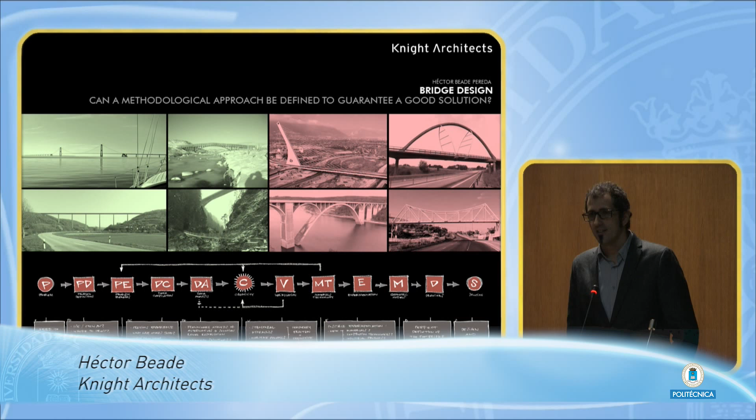The title of my presentation is Bridge Design: can a methodological approach be defined to guarantee a good solution? It's an ambitious topic. The aim is to define a series of steps where the designer should pause on their way to a good solution, but the final objective is to make something useful as a tool for reflection on bridge design as a process, and to reflect on why so many bridges out there are far from what could be considered good designs.

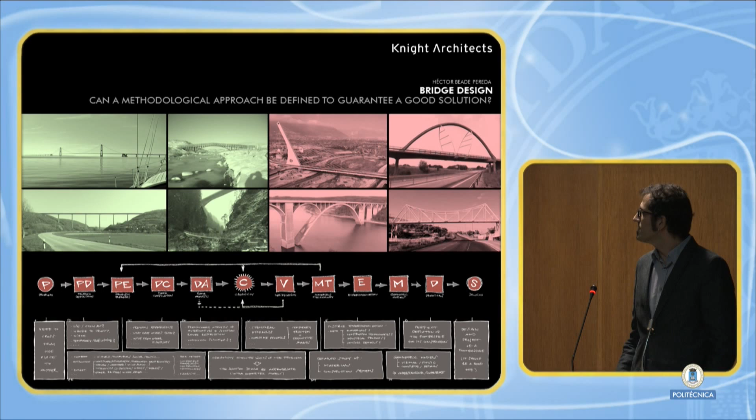We've already seen some of these in the Sebastian presentation. So I'll start with some examples of bridges that moved me to write about this topic.

I'll start with what I call narcissistic bridges—bridges that feel strong, high, and good looking, and use the spans they want independently of the obstacle they need to cross. They can be in large cities of the United States, or the same bridge can be in a small city in the north of Italy, independently of whether what is being spanned is clear or not.

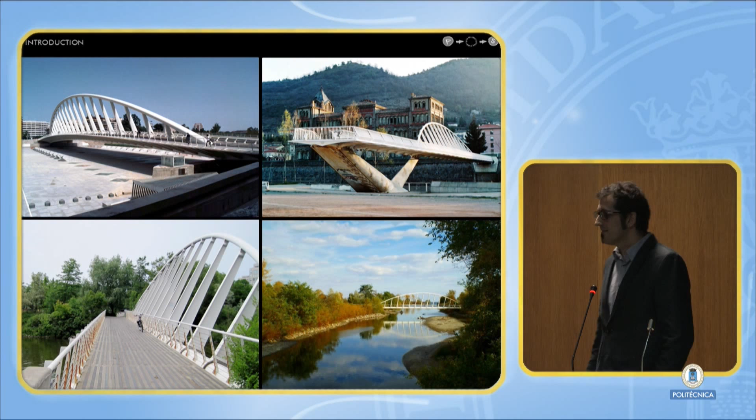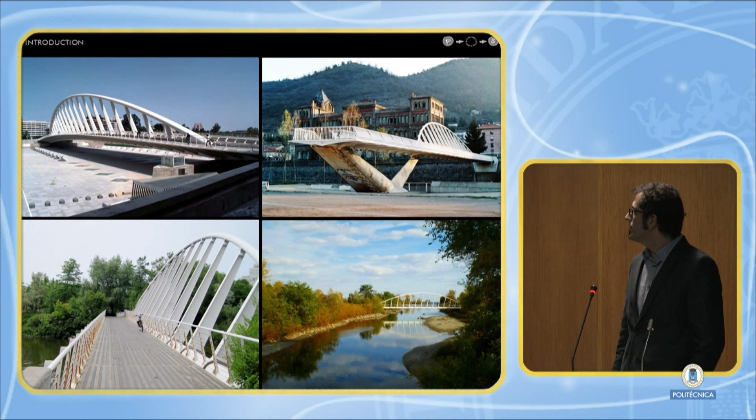What's important is the bridge, not the context. It doesn't matter whether there's an obstacle to be crossed or not. The same landmark design can be used in the countryside, in a large city, or in different urban contexts.

The previous examples were probably arguable as bridges, but could be considered nice solutions, some as macro sculptures. But when others try to copy the same layout, the result is different—they don't have value even as macro sculptures.

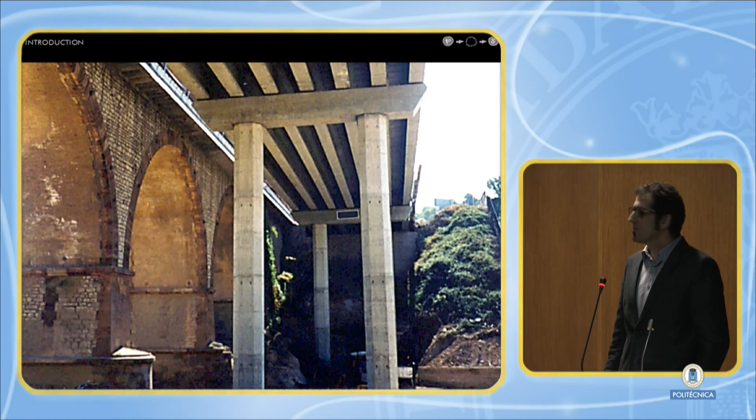There's another type of narcissistic bridge which seems the opposite, but shares in common that they're only worried about themselves—about solving the crossing problem easily and fast, with low investment in design. They can be extensions of historic bridges, cross rivers with piers inside the water, or solve complex road junctions.

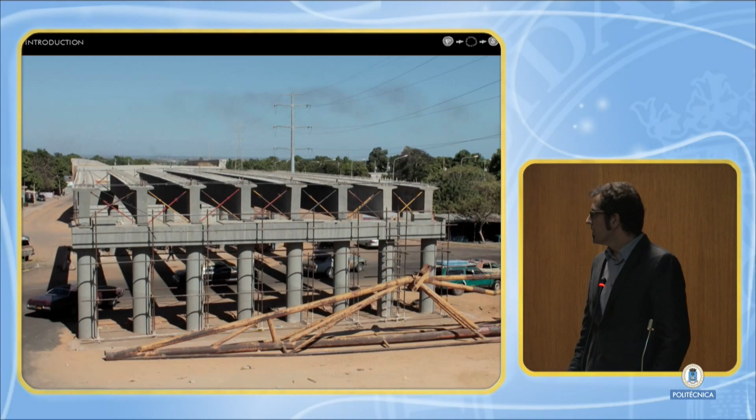You'll know many examples like this around the world. The same happens with footbridges—it's widely used in Spain because you don't need a designer, you just use drawings published in the 70s and modify them, and you have a bridge. You end up with a side span over ground longer than the main span, which is clearly bad design. You can find this type of footbridge everywhere.

But all of them need to stand for 100 years or more. So every bridge is important. Every bridge should be carefully designed. And this doesn't mean it would be more expensive.

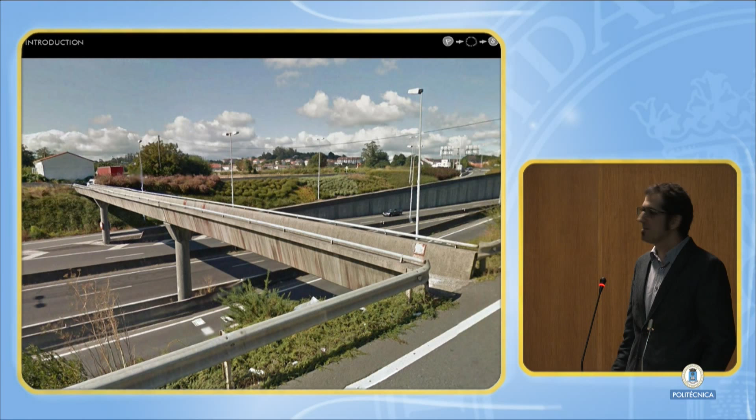This is an example of how a designer is sometimes considered useless—using U-shaped precast concrete beams, you have a footbridge with the parapet included. So why would you need a designer? And the pipe runs outside the bridge, but who cares about these things?

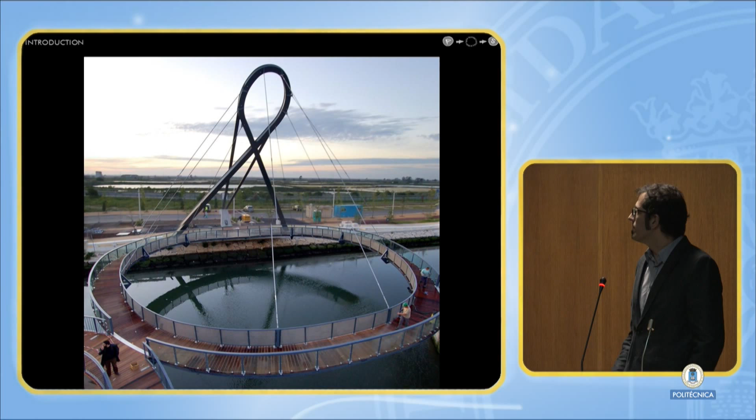Nowadays there are no limitations in terms of structural analysis, construction, and geometrical modeling. So everything is possible. Bridges that were not an option years ago. Some examples are good, some others are improvable, but everything is possible. This makes that sometimes things are built just because it's possible.

This is an example of a bridge, it could be in the narcissistic chapter. It's a footbridge with 4 different ways to cross, and all of them have steps, so functionality is not relevant. Any disabled person, or non-disabled person, could not cross the footbridge comfortably, but who cares?

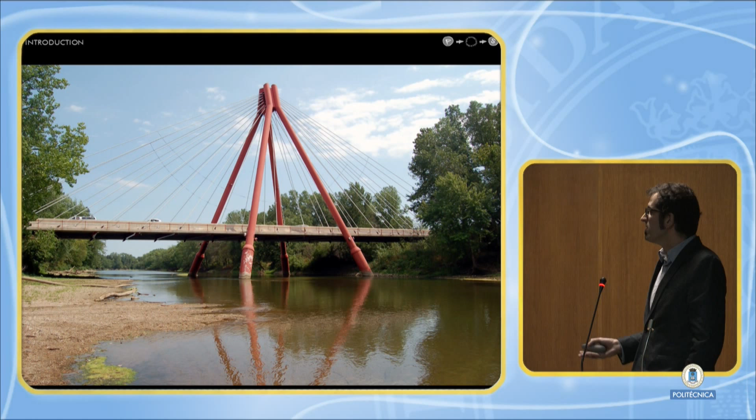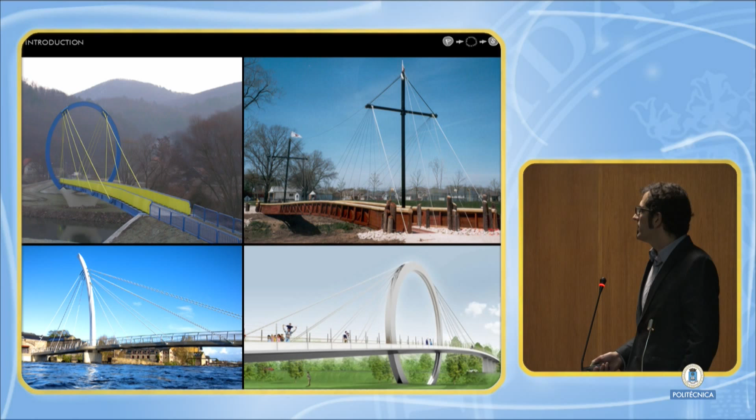There are hundreds of examples of bridges that sometimes are structurally orthodox, but you think they should have been better. This is an example of a bridge that crosses a river with a cable stay scheme, and all the substructural elements are inside the water of the river, which is surprising. Some of them are likely wrong from the structural point of view, or very wrong, as this one.

This is another example, you can find them everywhere. This will be orthodox from the structural point of view. It's a bridge type that's difficult to make work visually well, but will be right. This is a bit more strange, but maybe right. And this is absurd.

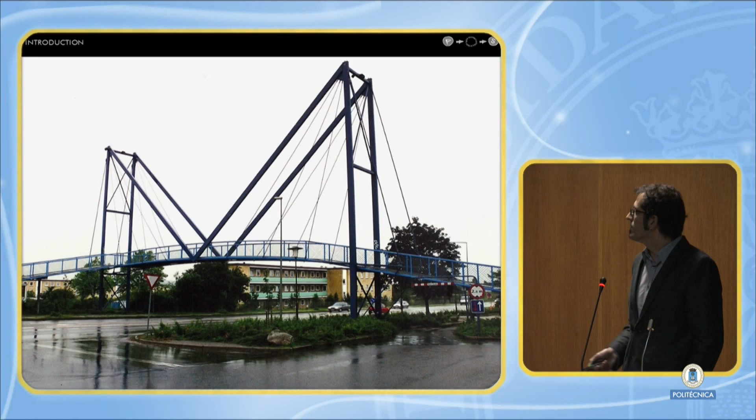This is just to contextualize that there are no limits, and everything is considered and even built. There are other examples that you don't know if they are absurd or not. It's difficult, or worthless, trying to understand them. They are everywhere, close to my home.

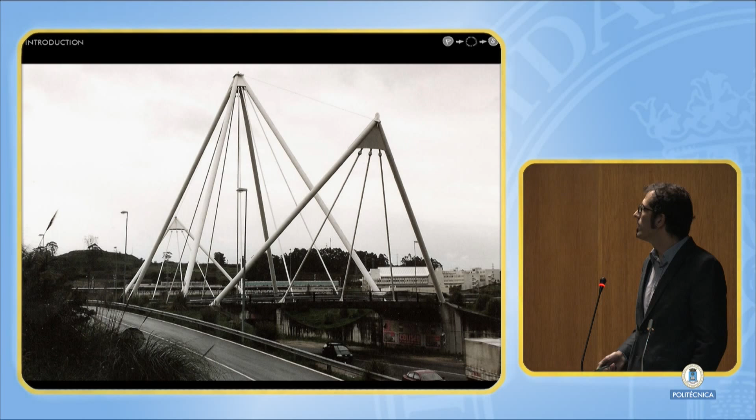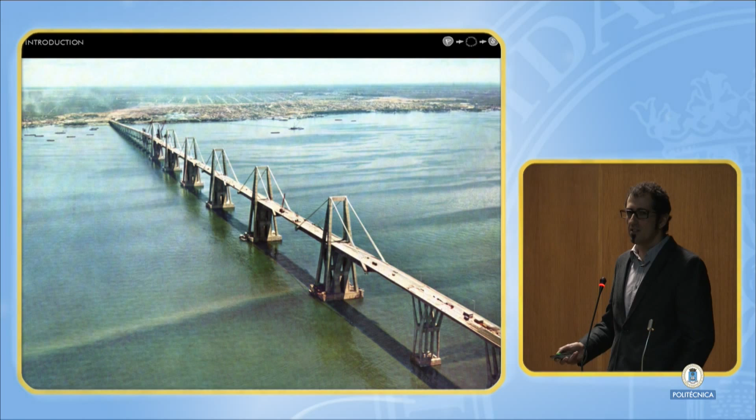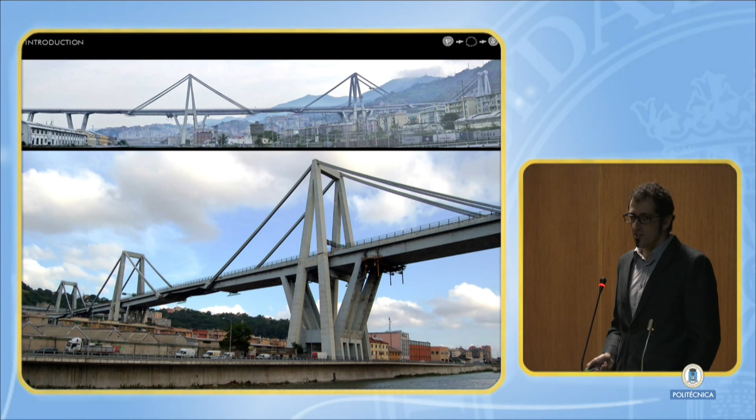An example of how a design can be good or bad depending on the context. This is a famous bridge, the first multi-span cable stayed bridge, which looks reasonable in the immensity of the Maracaibo Lake in Venezuela. It looks weird, a bit wrong in Libya, in this V-shaped valley - this should have been a deck arch - and completely out of place in an urban context in Genoa. That's what comes to my mind.

So to compensate part of the negativity caused until now, I'm going to show you some examples of bridges that I consider good designs. And the question is, does a good design need to be striking? So these are just some bridges I consider good designs. This has been shown before.

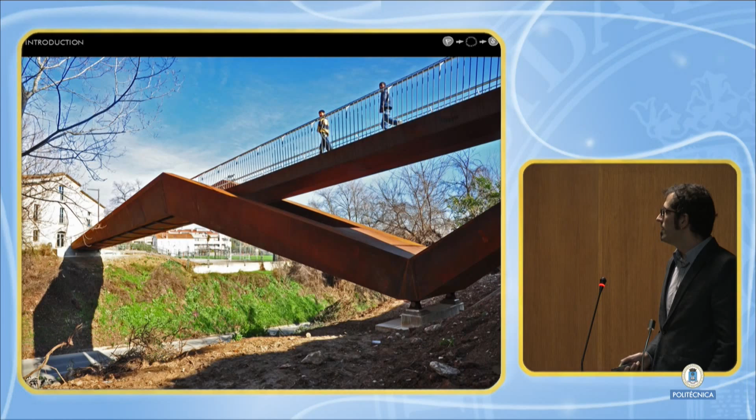The first step in the process will be the problem. In this case, the problem in bridge design is simpler than in other disciplines. In industrial design, the problem could be very variable. The problem is always the need to cross from one place to another. So the first question will be: do we need to cross? And if we need to cross, do we need a bridge? This is the responsibility of the client, of the owner.

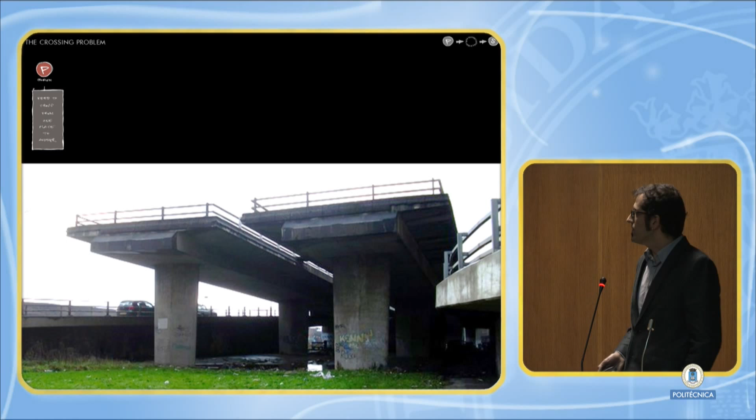There are a number of bridges that have started to be built, and after decades they are still unfinished. It's probably because they weren't so needed. So this will be the first question.

The second question will be the problem definition, which is again the responsibility of the client and the owner. A designer can be involved or not, preferably yes, and it can be the final designer or not. Some of the points to be defined would be the use of the bridge - road bridge, rail bridge, combined use as pedestrian/cyclists - where to cross, plan alignment is very important, the width of the bridge depending on traffic, and if it's temporary or definitive, or if it has temporary uses that are different from the final ones.

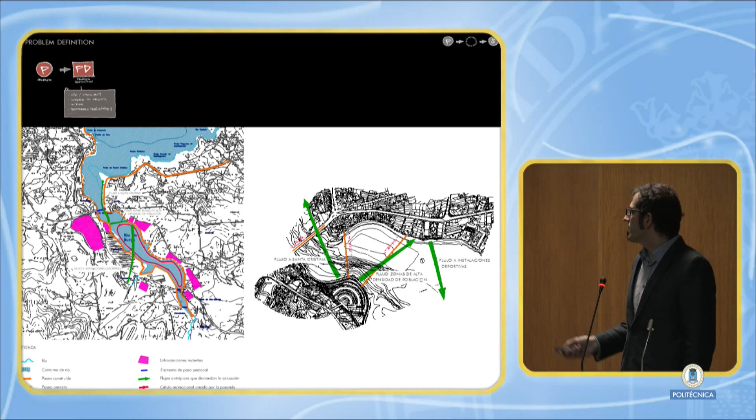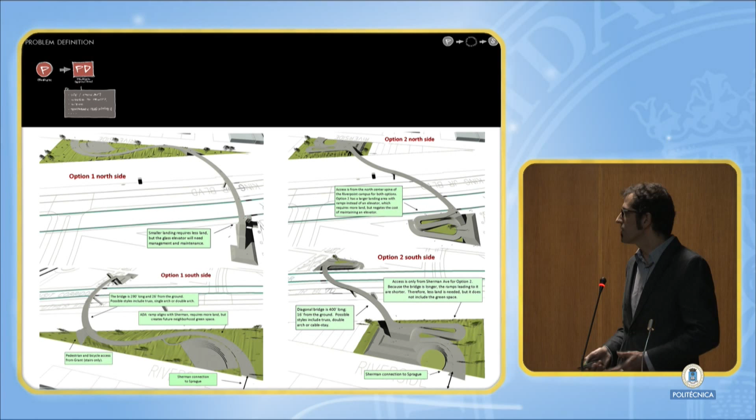So these are some images showing decision making on where to cross in a footbridge. This is a brief from a competition in the United States. It was part of the brief that the client worked with a designer to choose where to cross before all the teams were involved. A recent project deciding where and how to cross, deciding the width of a bridge.

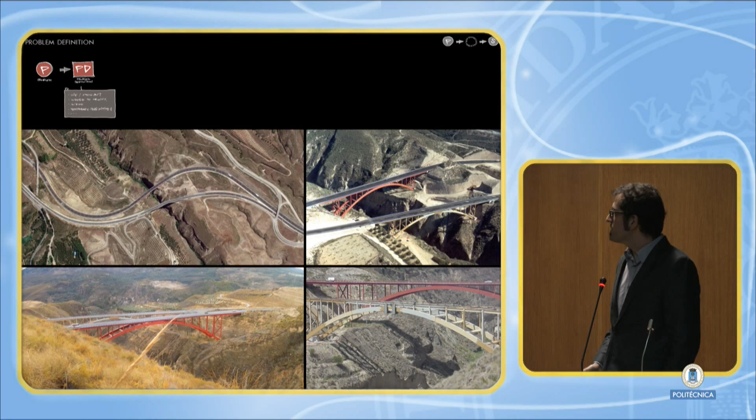This is another example in Spain of two bridges that are really close. The red one was the first to be built. Six years later, the second one was built, which is not parallel, but is close. So it was decided to use the same geometry as the first one, but it wears a camouflage hood. This is because the relation is strange, it's difficult. These bridges should have been a single one or two close parallel bridges.

Next step will be the splitting of the problem into smaller elements. If you try at this stage, when the client has defined the problem, to look for a solution for the whole problem, it will be very complex, and you will probably tend to do something you have done before and just adapt it, because you will be overwhelmed by the complexity of the problem.

So if you split the problem into smaller elements that you can easily understand, and look for solutions to these sub-problems, solutions that could be maybe close to the optimal because they are sub-problems, you will understand better what you have in hand. So some of the problem elements will be related to the context: historic, cultural, social, environment, landscape, wind, seismicity, geotechnics. If there are other bridges in the area, that's important. Also the budget, of course.

So this will help to set the boundaries of your problem. This is in fact the second principle of the Cartesian method, so it's really valid nowadays for many fields of knowledge. The discourse was written in 1637, so it's probably valid nowadays.

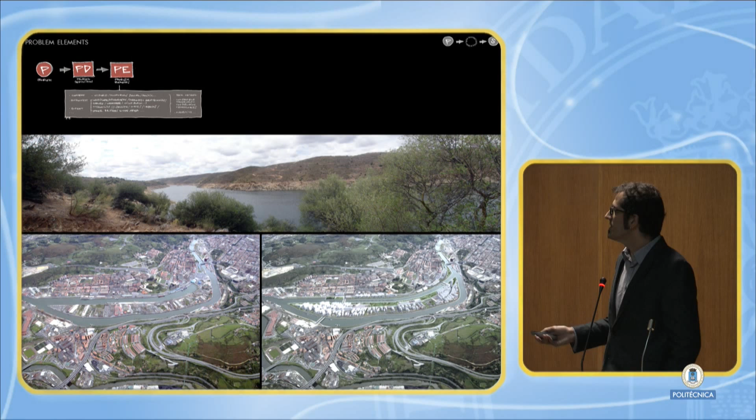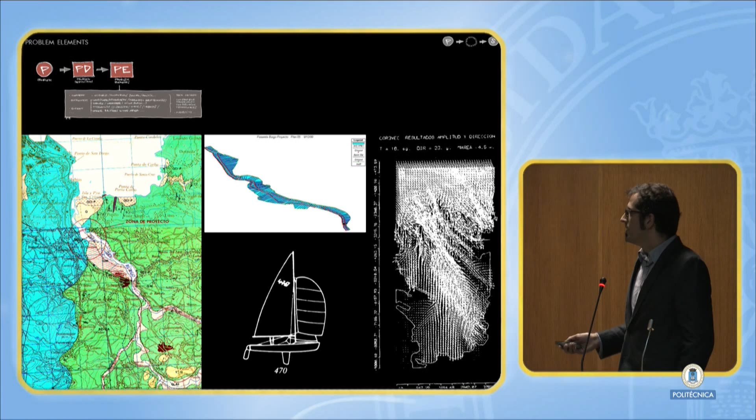Some examples of different environments, in this case landscapes, where a design could be located: rural or industrial and urban, or urban but in the historic city center, or peri-urban, related with the environment but not the landscape, geotechnics, hydraulics, navigational requirements, other bridges in the area.

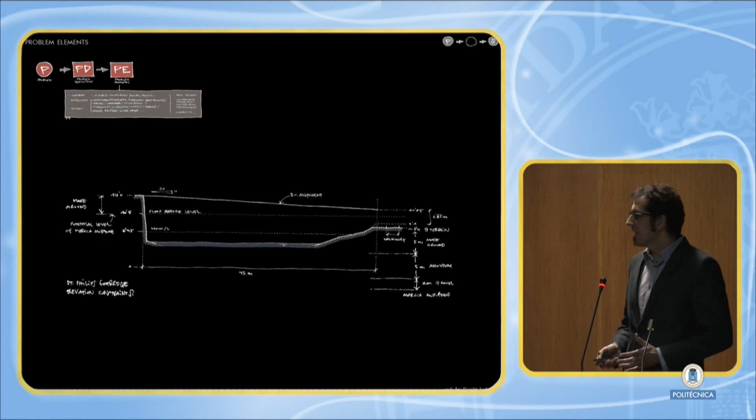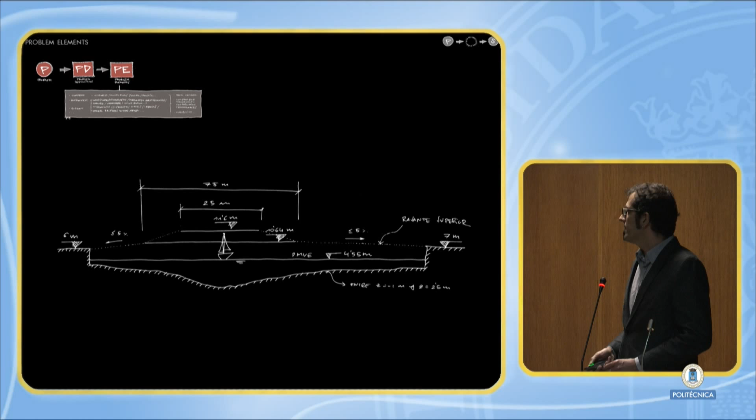After this splitting of the problem into small elements, you will normally have this kind of drawings that would help you to limit the boundaries of your problem, just to focus on what you can do or what you cannot do. So you will have a certain span, more or less clear. You will know what materials can be used or not, more or less, and what construction systems may be compatible.

The next step will be the data compilation. It's not worth trying to invent the wheel in every project, so it's useful to see what has been done before. The first approach will be what have you done before, in your own office, so previous own experience. Then what others have done is also useful and recommendable. And it's also useful sometimes to look for inputs from other disciplines.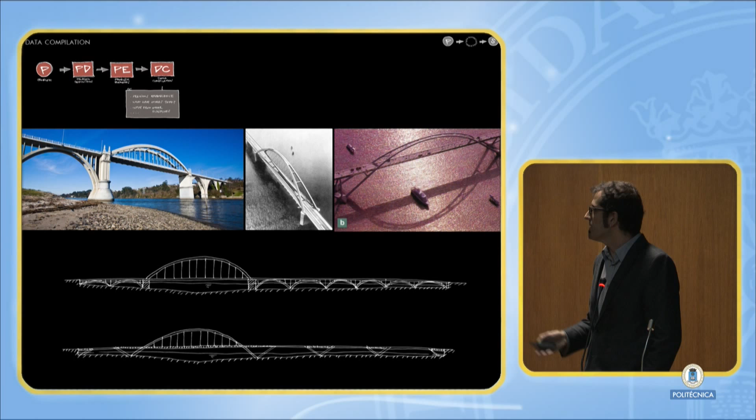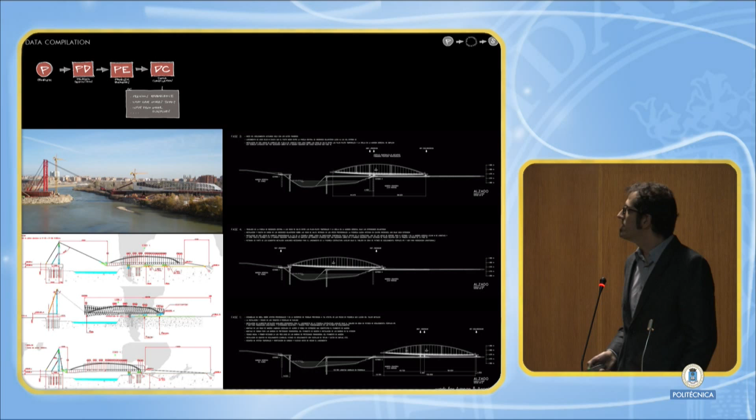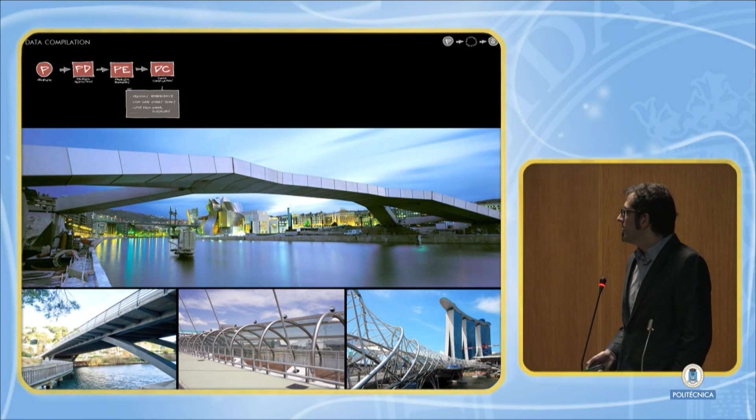So this is an example of an own project, seeing what has been done before in similar crossings, the same in another own project, what construction systems may be compatible with your case. In terms of materials, if you're using novel materials - stainless steel is not so novel, but it's useful to see what others have done. And at the beginning, when these materials are introduced for the first time, it's useful to see what has been done in other disciplines.

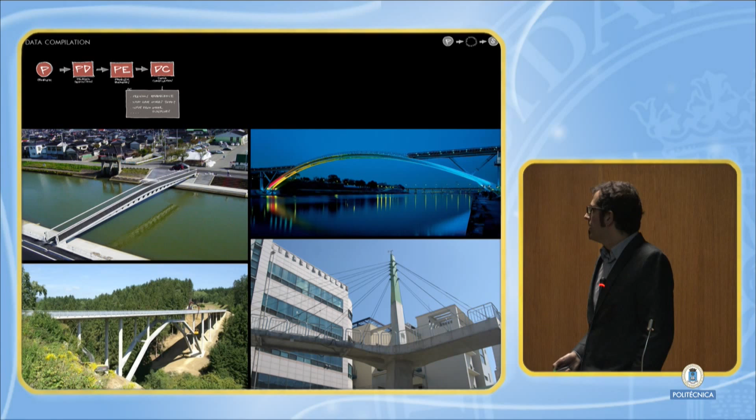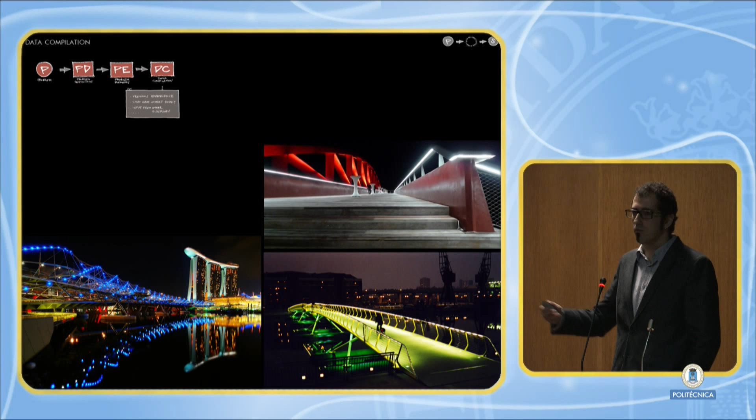Same, this is ultra high performance concrete. Seeing what's the state of the art in terms of lighting is also useful, because it's something that changed a lot, and it's important to take into account lighting from the early steps of design to have a holistic approach, and not to add floodlights to a finished design, which would probably lead you to an improvable solution.

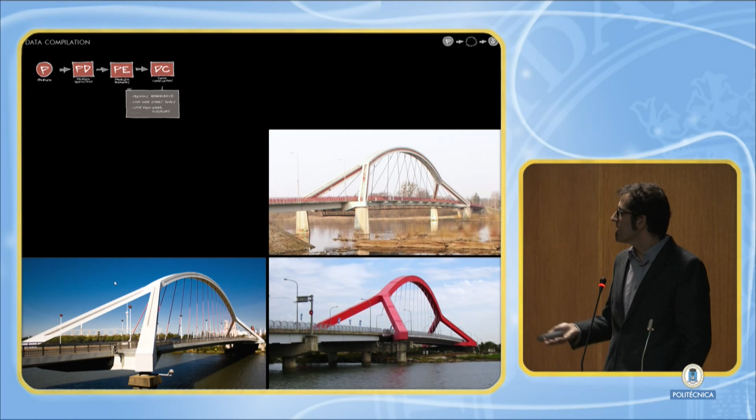But what happens if you go too far with the data compilation and don't just use the same idea, but use the same structural scheme, the same arrangement of elements, and the same detail? You're copying a bridge, and when you're copying a bridge, it's unlikely that you have a good design or a good solution to your problem.

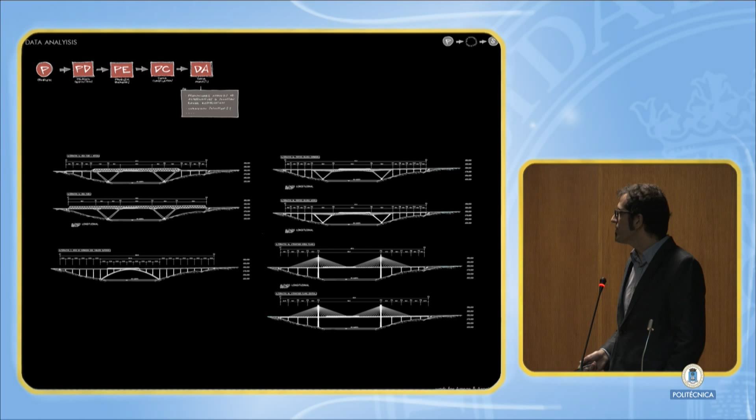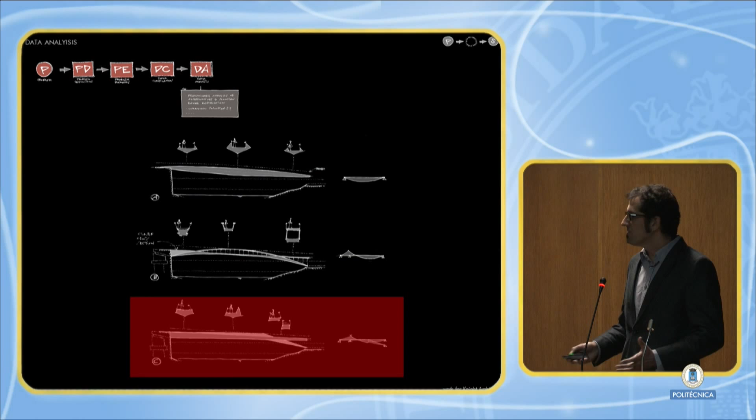Next step will be the analysis of this data. So this is the moment to have preliminary analysis of alternatives, which is, in some examples, not just choosing one alternative. You can choose a series of them. The important thing is to limit your scope, and you can choose as well a range of materials and compatible construction systems, with some cost estimations to know that you're within the range of the budget you have.

So we reach the creativity stage, but having done quite a lot of work before, so it's creativity within the limits of your project. It's not fantasy.

There are apparently two ways of being creative in a design process. Both of them are cognitive, so they require experience and knowledge in the field you're working, and ideally in other fields as well. The first one is deliberate and cognitive creativity. This happens in the prefrontal cortex, and it allows you to pay focused attention on what you're doing, deliberately combining bits of information you have in novel ways. A paradigmatic example of this type of creator is Thomas Edison, doing thousands of experiments and failing, but always going a little step ahead with these failures.

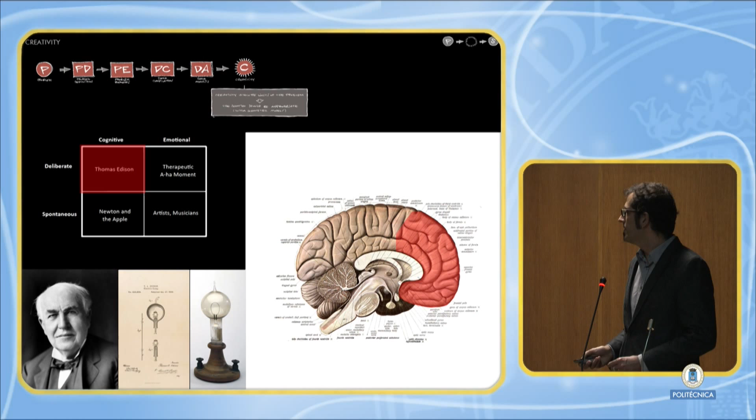The other type of creativity used in the design process is also cognitive. It also requires work, knowledge, and experience, but it is spontaneous. It also involves the prefrontal cortex, but the role of the basal ganglia, where dopamine is produced, is apparently relevant, and this happens outside conscious awareness. This type of creativity happens when you've worked intensely on your problem and then go to sleep or go for a run or do something unrelated, and magically an idea that solves your problem comes up. This is not magic, it's because your brain has been working for you without being conscious. Newton and gravity, seeing an apple fall, is the typical example of spontaneous and cognitive creativity.

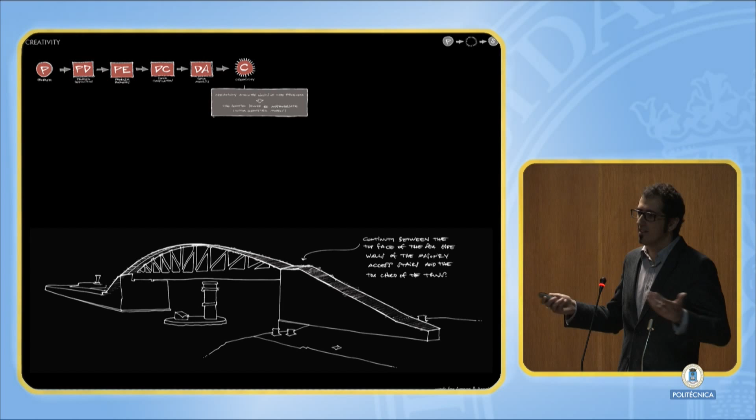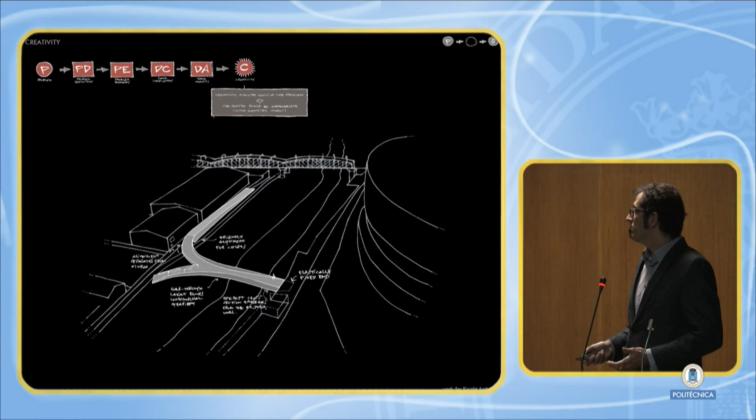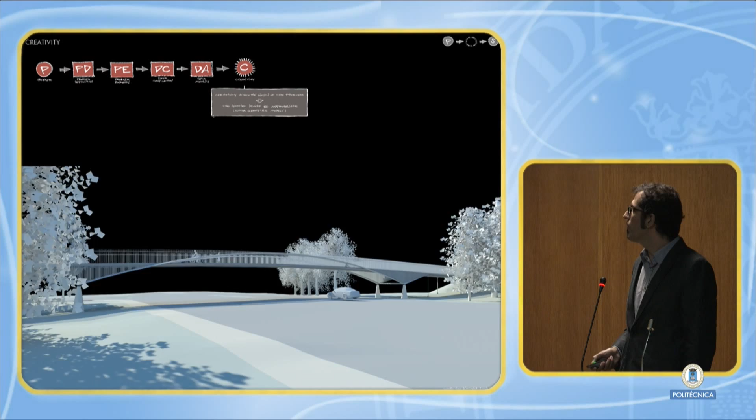So the creativity stage is really wide. It's the stage of doing a lot of sketching, trying things, doing models, testing, failing, doing some structural analysis to see if things work or not, checking if things are compatible with potential construction methods. So it's the moment of doing a lot of kinds of modeling, or combining different types of modeling, even physical modeling.

So we have reached the verification stage. Verification of bridges is mostly structural, but can also be related to hydraulics, marine dynamics, and so on. This is an important stage, more important if the bridge has a long span or is complex or slender. But I would say it's not the most important stage. A bridge can be perfectly analyzed and still be a really bad design. So many people feel comfortable here and are willing to get to this stage as soon as possible. That happens quite frequently.

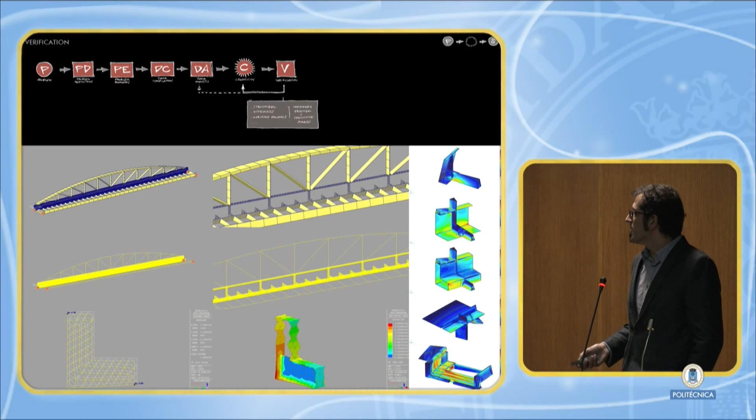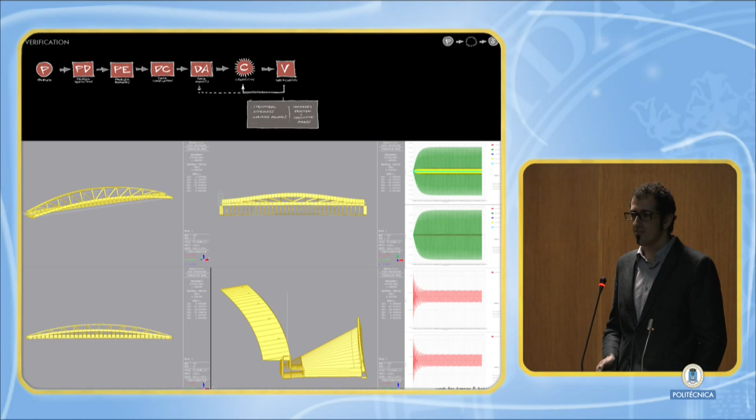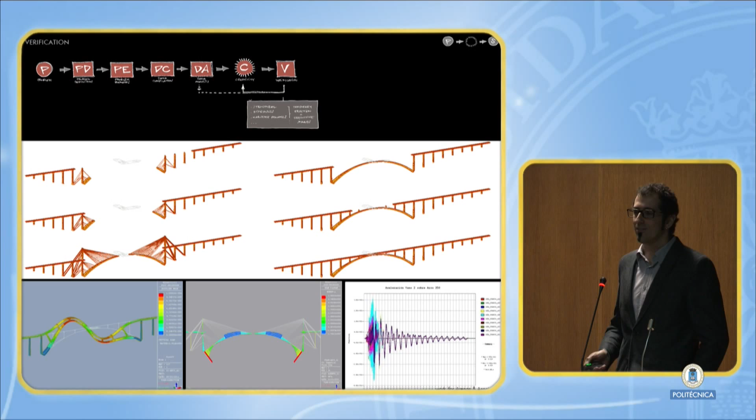Having said that it's important but not the most important thing, it's very important to do it well and to not pass your limitations in the structural analysis to the project. So if you don't know how to do things, just look for advice or try to learn, but don't try to go to where you feel comfortable just because of your limitations, because you will be passing your limitations to the solution, and the solution should be as good as possible.

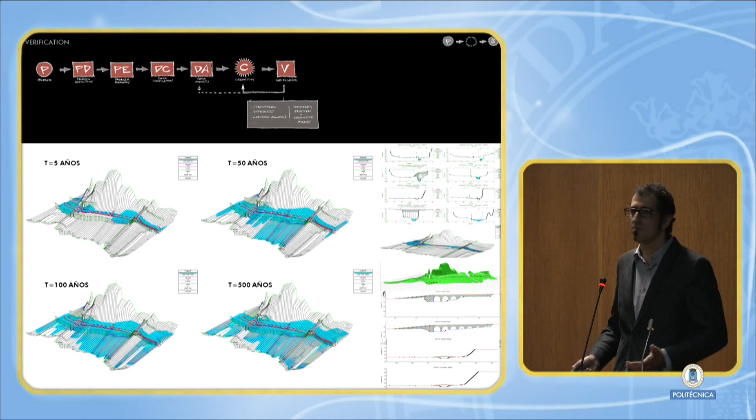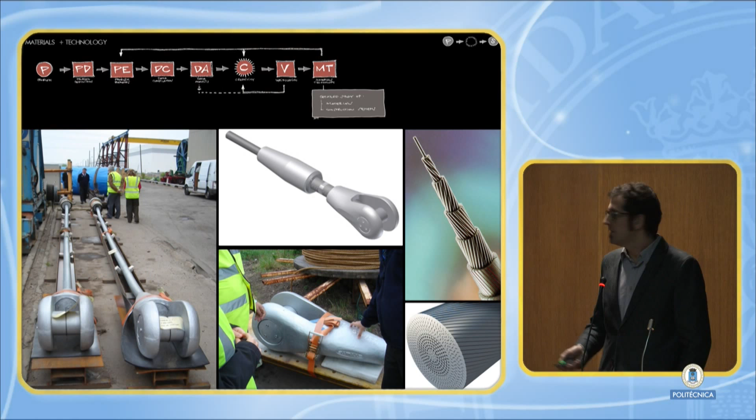Next step will be materials and technology. We have mostly decided the materials that will be used and the construction system as well. This has been done before, but now is the point when you decide more specific things, like the type of hangers you're using, if you have a bridge with cables, the post-tensioning system, the type of bearings or expansion joints, and all these things can influence the design, or show you that they are incompatible with what you have been thinking.

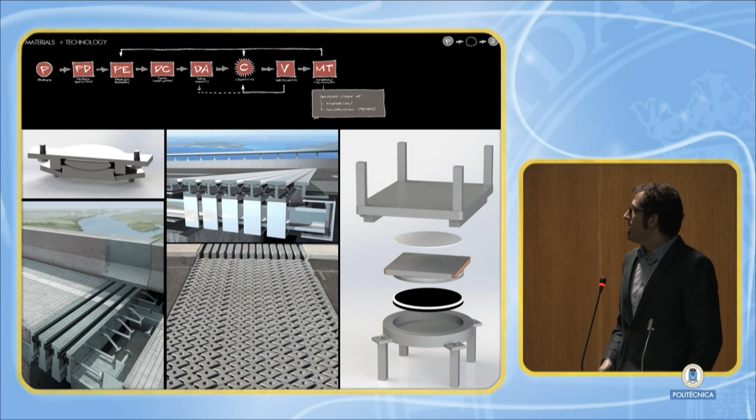So this may force you to come back some steps in the process. The process is drawn as linear, but is in fact far from being linear. It's just for didactic purposes. It's very iterative, and everything is quite mixed all together.

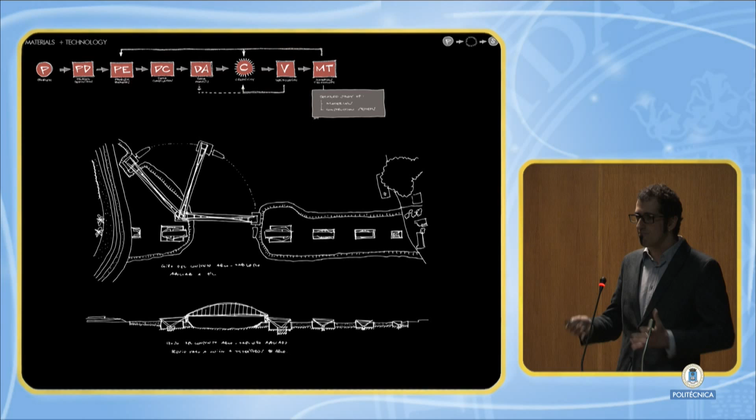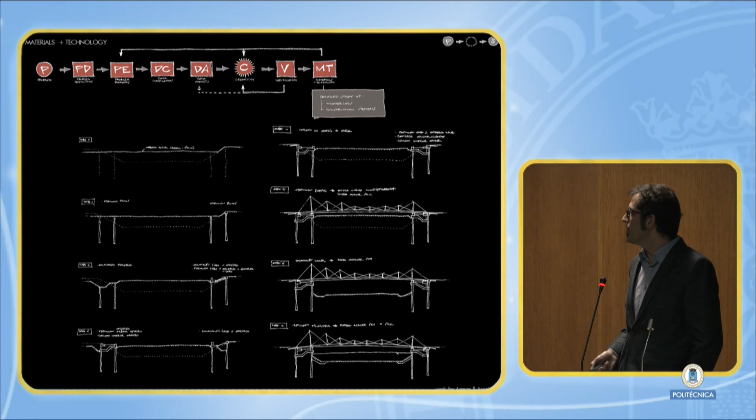So this will be the point to decide if the construction method you have in mind is really possible, how it affects your design, if you have space on site to place the building equipment you need for this construction system, and so on.

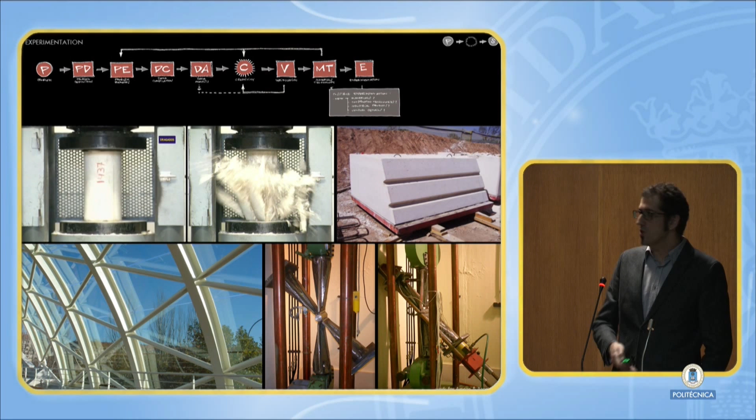Next step will be experimentation. This is not always needed, but it's good not to avoid it if it's useful. One type of experimentation will be related to materials, for example, if you're using new materials or materials that have been used before but in a novel way, or some unconventional details that will be repeatedly used in a design.

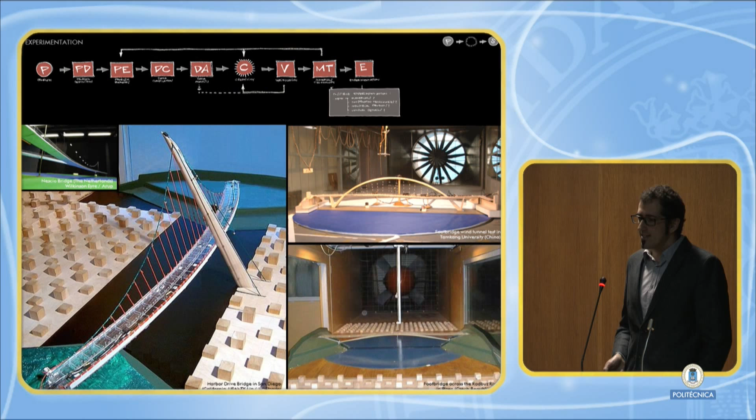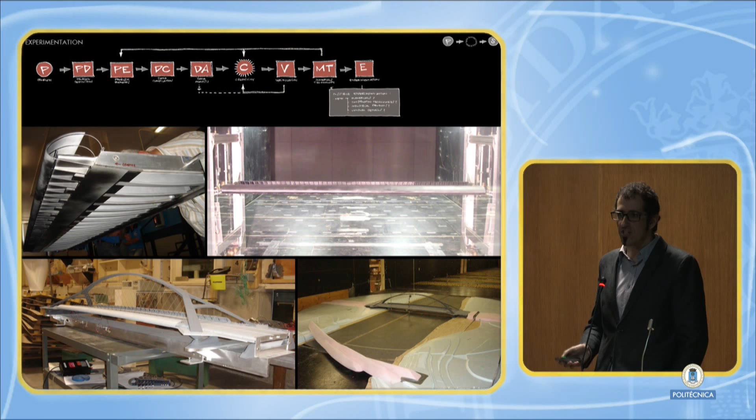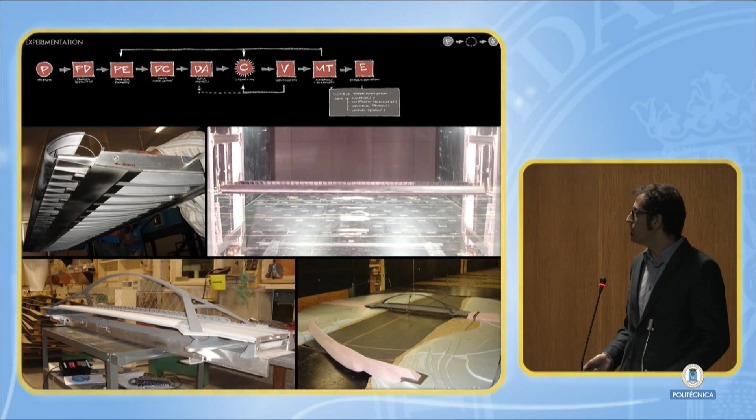Wind tunnel testing is a typical type of experimentation carried out in bridges, and at this stage it will just be a verification of previous assumptions. So if you really want to use the results to have a cross-section with good behavior in terms of wind response, it will be useful to have the input in previous stages, or to link it to the verification or creativity stage.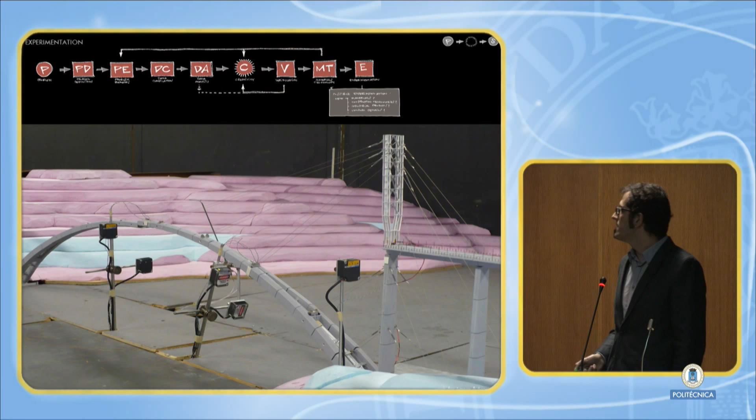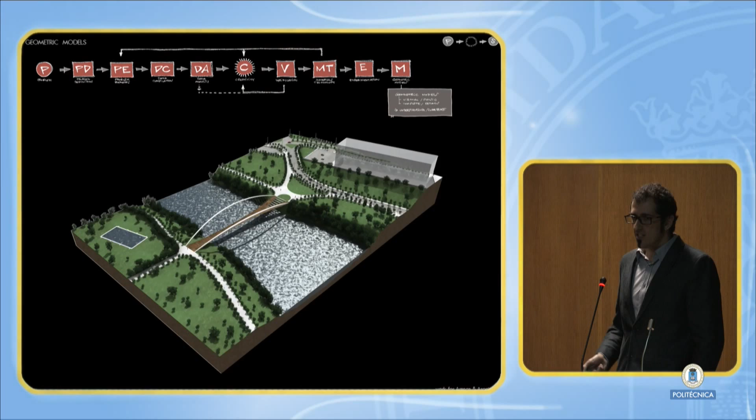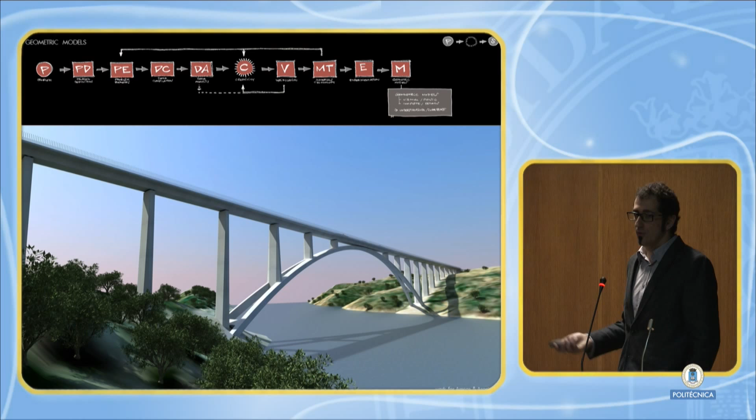Next step will be the geometrical model. It's the moment where we mostly have a design, and it's good to model it to check that there are no incoherencies, inconsistencies, incompatibilities, and to check that everything is feasible to be built. It is also useful to inform the client of the progress, and useful to produce the drawings, which is the last step.

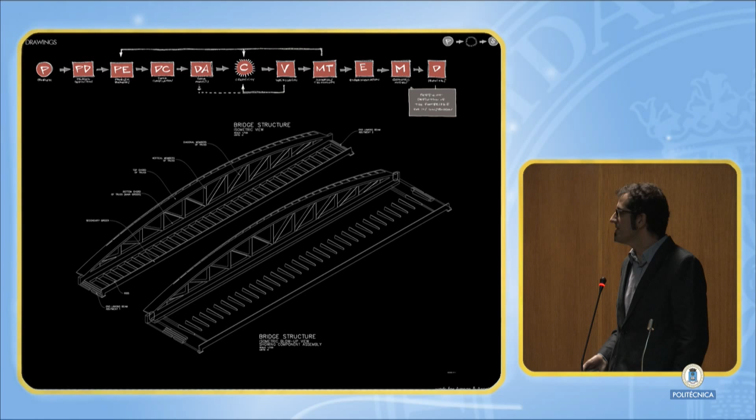The drawings will be the perfect definition of the bridge you have designed. It's important because you can have a great design, but if you don't define it properly, maybe what gets constructed is not exactly what you have designed, or it becomes an excuse to change things. So a good design should have good drawings.

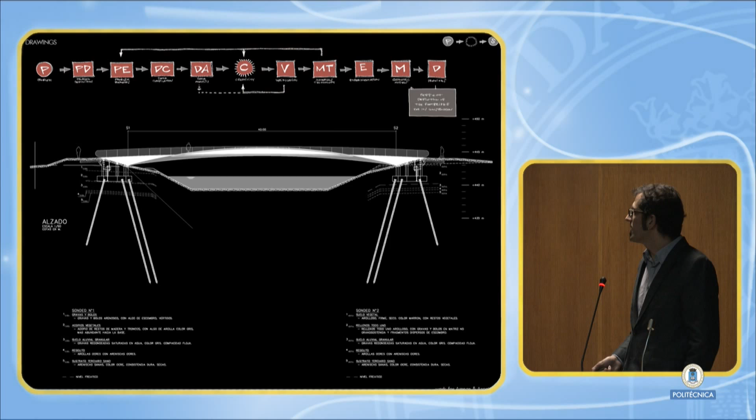Some examples of drawings from some of my designs.

And we have reached the solution. The solution with all this process should be a good one, or at least in the range of the good ones. The method by itself is useful, but it's not enough. You need also a skillful team, both owner and designer, and an appropriate allocation of economic and time resources for the problem being solved.

So that's a series of conclusions. The methodological approach intends to be a tool to reflect on why there are so many bridges that are improvable, let's say. The service life of bridges is 100 years or more, so every bridge is important, and the work of the bridge designer is a work of great responsibility. We are using public funds, so we should do our best to get the best designs.

Ease and speed of design and construction should rarely be considered as basic parameters in a bridge project, because the period of design and construction is very limited compared to the service life of the bridge. This relates to the low-profile, narcissistic bridges we saw before.

It's worth investing in design. And good design doesn't mean expensive design, or that you will have an expensive bridge. How competition is organized is determinant for the process, so the role of the client is basic.